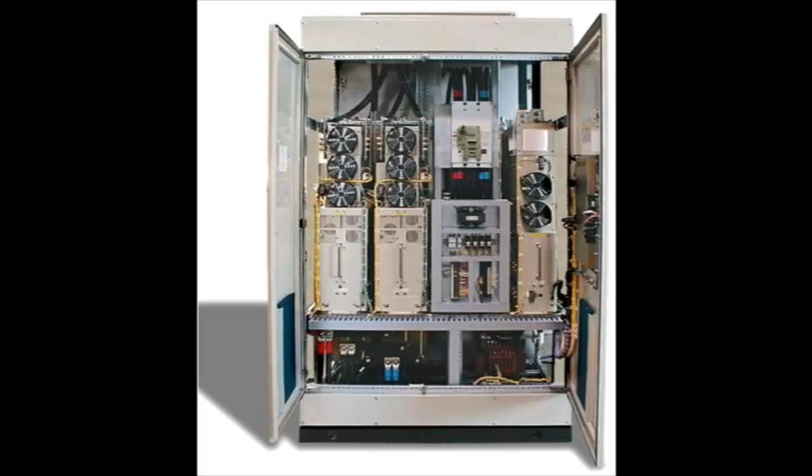Welcome to the Sigma-5 tuning Quickstart video. This is Matt Pelletier, and in this video I will demonstrate how to use the auto-tuning feature using SigmaWin Plus. The system I'll be tuning you may have seen before in the Sigma 2 tuning class.

It's the Rotary drive demo, and it uses the SGM GV09 motor with the Zero Max coupling directly coupled to a 10-to-1 load. The amplifier is a 400 volt SGDV 3R5, and the tuning challenge that we have is the same one as from the Sigma 2 tuning class.

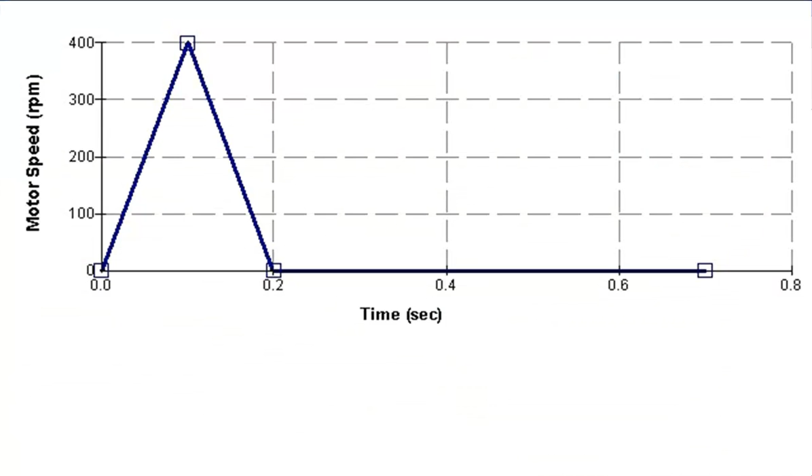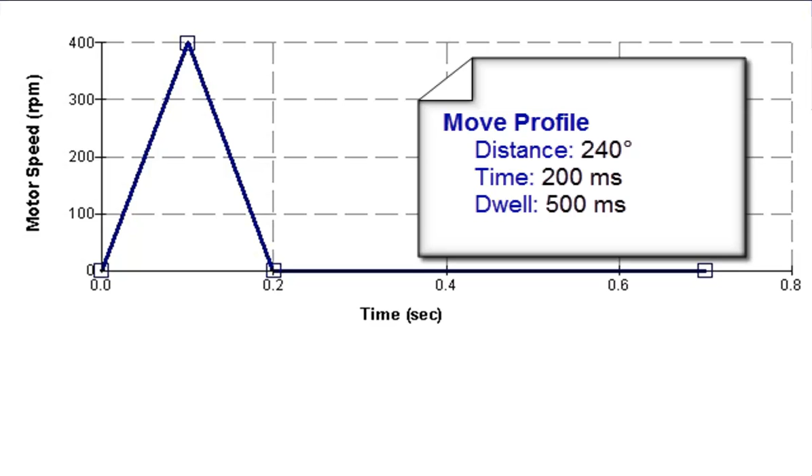We have to move 240 degrees in 200 milliseconds with a 500 millisecond dwell, and the tuning goal is that we would like this machine to operate smoothly and quietly and to settle within 0.07 degrees of the commanded position with a settling time of less than 100 milliseconds.

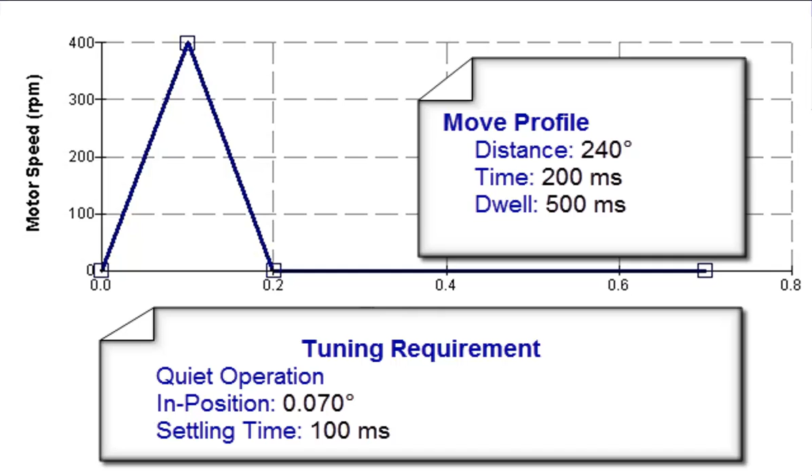So at this point I am connected, the servo pack is on and is at default parameter configuration. So my first goal is just to get the out-of-the-box performance. Let's get a benchmark of the performance. And out of the box we are using the default tuning feature, which is called the tuneless function.

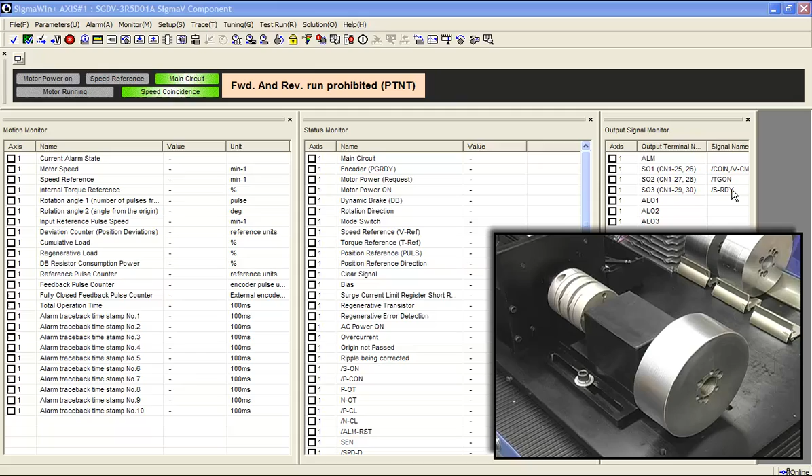But in order to do that, first I need to set up the amplifier and configure the parameters. And the easiest way to do that is to use the parameter wizard. So I'll go up here to parameters and setup wizard. And you'll notice that everything's grayed out except the encoder selection.

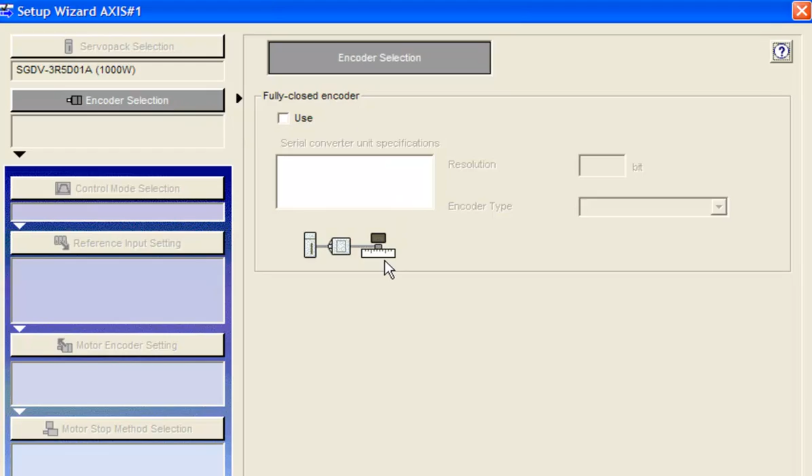So I'll use encoder selection first, and I'll confirm that the fully closed encoder, the linear scale, is not used. So I'll leave that unchecked and hit apply. And now that opens up these other buttons that are not grayed out anymore.

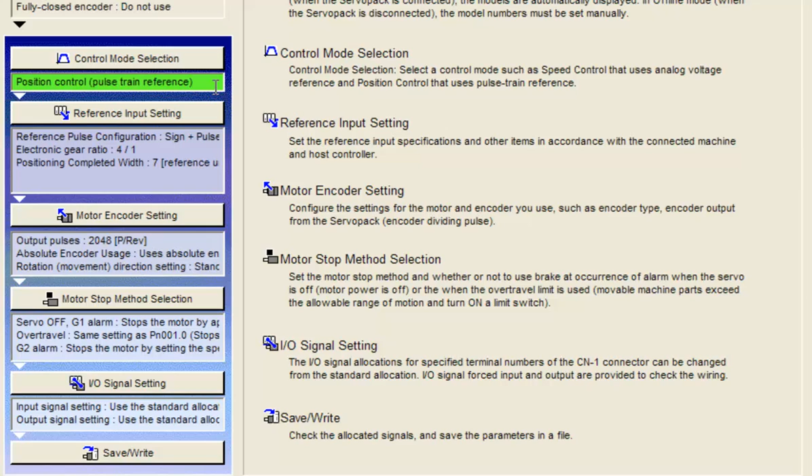First I'll need to set the control mode to position control. So I'll click control mode and scroll here to position control, pulse train reference, hit apply. Notice when I hit apply it shows that there's a change here with a green highlight. Next then is the reference input setting, and I'll leave the first couple screens here at default.

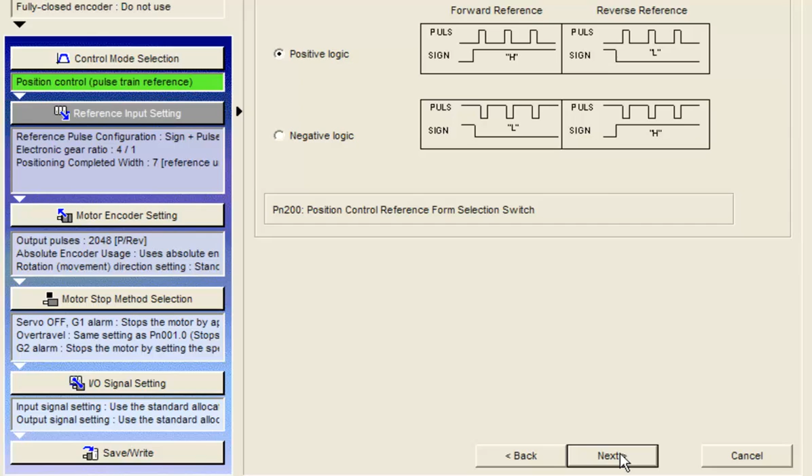These screens have to do with if you are connecting an external controller with a pulse reference output, then what type of format would you want. So I'll leave those at sign and pulse and positive logic. And here's where this wizard really makes things easy. We can set the electronic gear details, which means we can define how far the motor moves with one pulse.

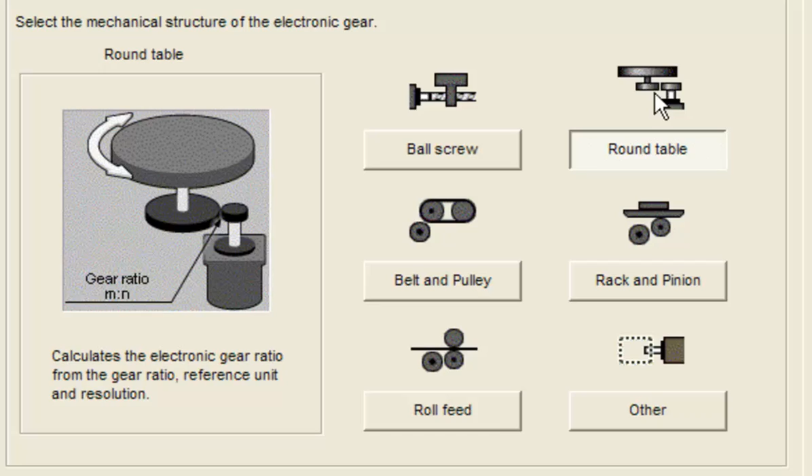So I'll click next, and first I can define the mechanical system by choosing one of the options here. And as you may guess, we have a rotary table, or round table as they call it here. So we'll choose round table. We don't have any gearing, but you can always put a 1-to-1 gear ratio there. And that is the first thing they ask for, the gear ratio, so I'll leave that as 1-to-1. Since there is no gearing, it's just a directly coupled motor to the load, and I'll click next again.

And then this is the part where it really makes it easy. All you have to do is choose the reference unit, and you don't even have to calculate the electronic gear ratio. That'll be calculated for you. This looks like a fine reference unit to me. This reference unit means the minimum motion. When you have one pulse from the controller, this is how far the machine will move, which is 0.001 degree, 1/1000th of a degree. And then the other field to enter here is the position completed width.

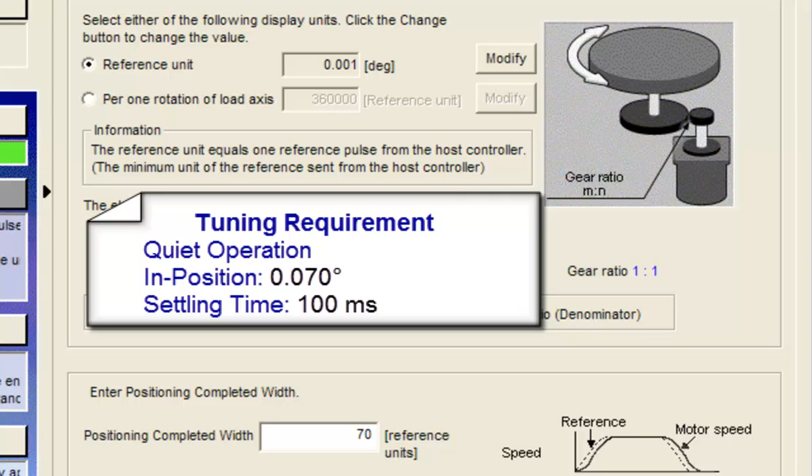This is tied to the COIN signal. You can see that down here. So if we want to have a position completed width, or in-position window is another name for it, we had said we had wanted 0.07 degrees. Well, if our reference unit is 0.001 degrees, I will need 70 reference units to equal 0.07 degrees. 70 of these will equal 0.07 degrees. And I'll hit apply, and that's done.

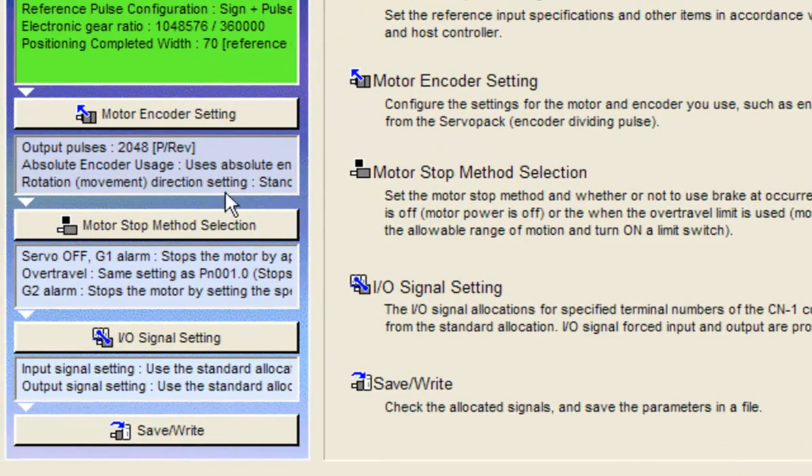Now there are some options under encoder setting and stop method, but we'll just leave those at default. The only other thing I want to do is go to the I/O setting and mask off the overtravels. It's also very easy to do that within the wizard. You go to input signal setting. You see I do have overtravels here. And so for P-OT and N-OT, the overtravels, I will set those to off. It's as easy as clicking always off and OK.

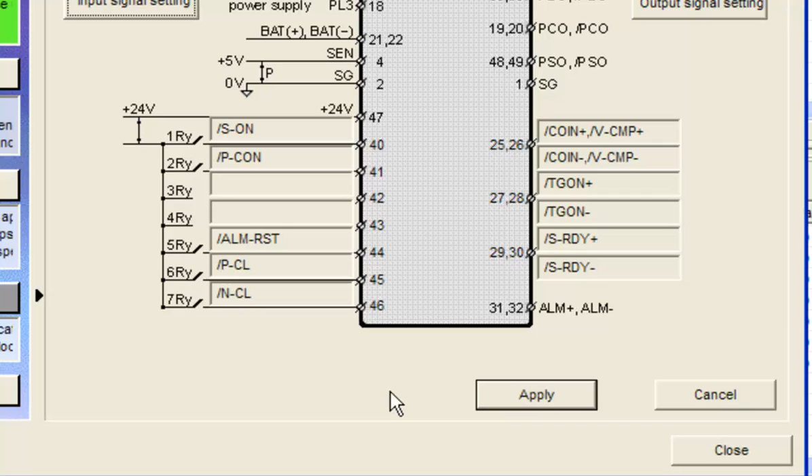And hit apply. And now you can see that these three areas have been changed. So the final step here is to write this to the controller. So we click Save Write, and you can even save a backup file of the parameters that are already in the drive. But I'm just going to write these parameters directly into the amplifier. So I'll hit Write.

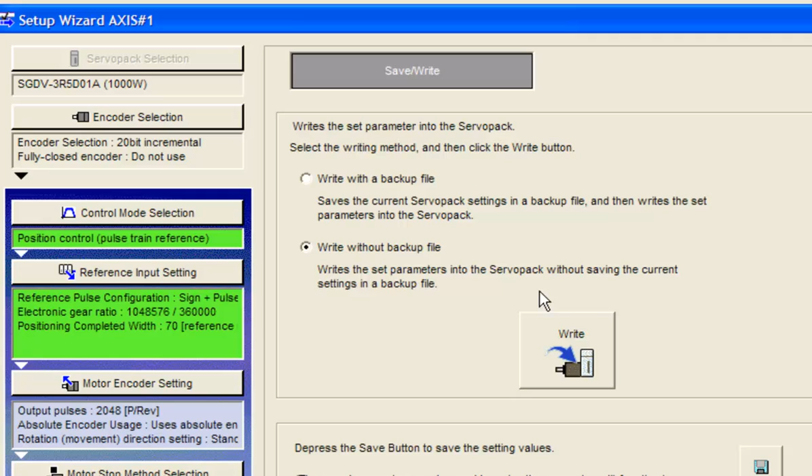This is acceptable. And I do need to cycle power, so I'll click OK. And I'm just going to finish this wizard. And you also notice that there is an alarm A941. Change of parameters requires cycle power.

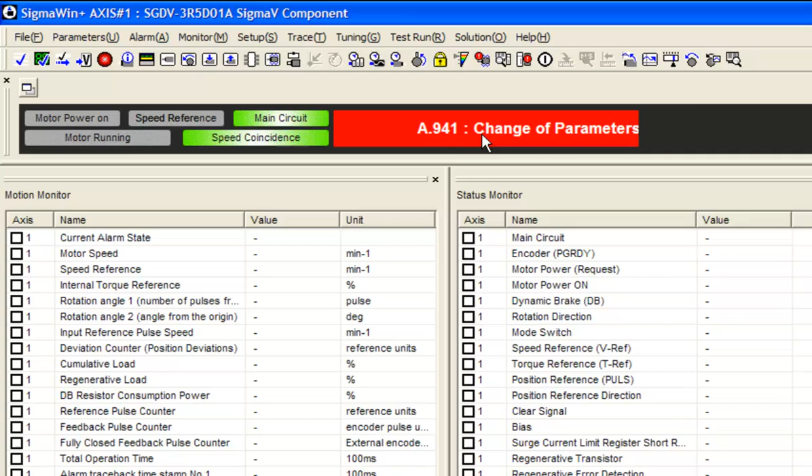There's a very easy way now in Sigma-5 to cycle power. You just use this right here, the software reset button. You don't have to actually physically cycle power. So just click that and execute. It takes about 5 seconds.

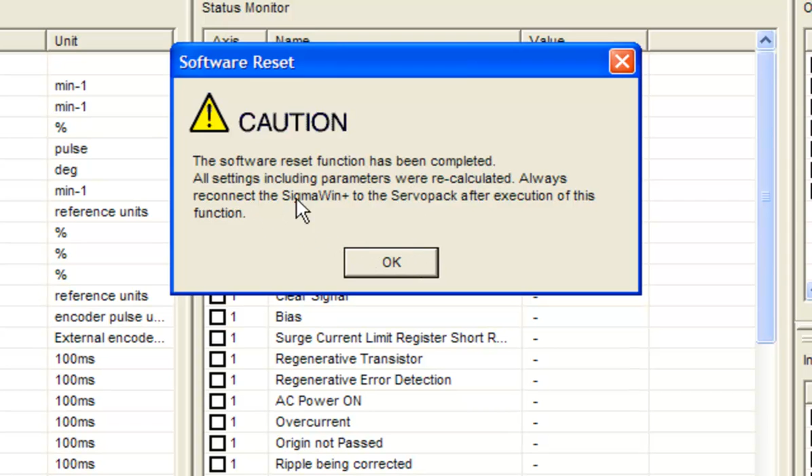Now, when you finish the software reset, it does say that you should always reconnect to SigmaWin Plus. Now, really the only reason for this is if you've remapped inputs, you can see it still shows that there's P-OT and N-OT mapped to the inputs. So everything will be updated when you reconnect.

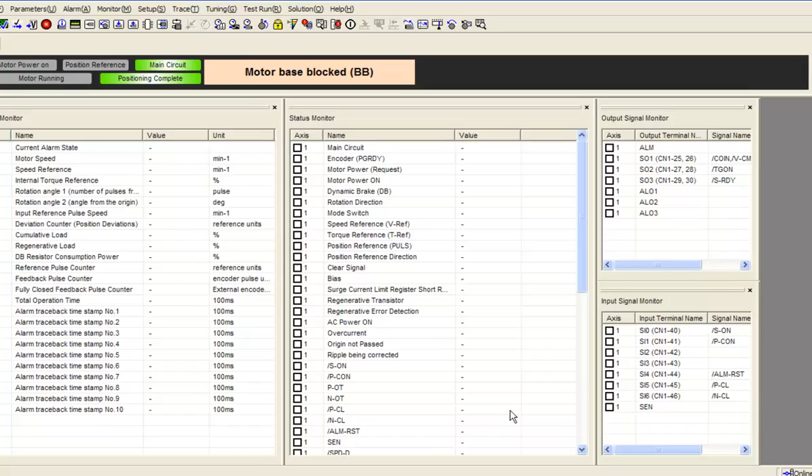So as best practice, I'm just going to go ahead and do that, do file reconnect, and connect to that same Servopack again. And now that I've reconnected, you can see that P-OT and N-OT are not mapped to these pins as they were before.

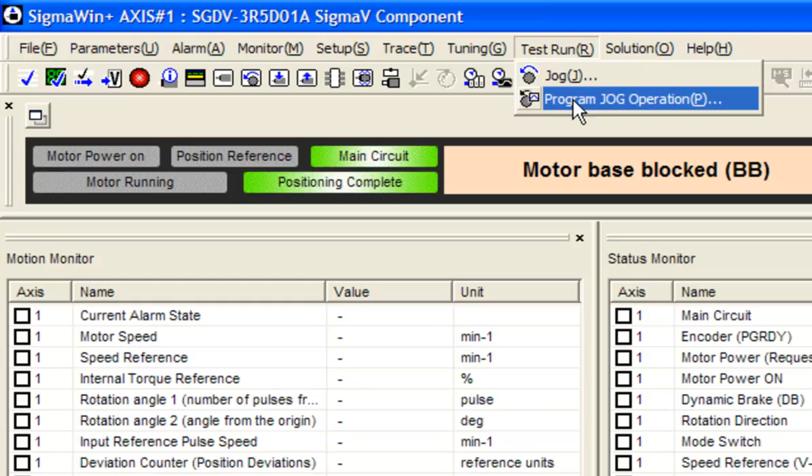So now my first goal is to find the out-of-the-box tuning performance. And so I'll use the program jog operation under the test run menu. And here are some safety warnings you should carefully read. And what program jog allows you to do is to program a simple move profile.

And so I'm going to put in the profile that we're tuning for, which is 240 degrees. And so that's the move distance. So 240. And that is in reference units. So I need to add 3 more zeros since the reference unit is 0.001. The speed was 400 RPM. Now, when you see min -1 as the unit in this software, that means RPM.

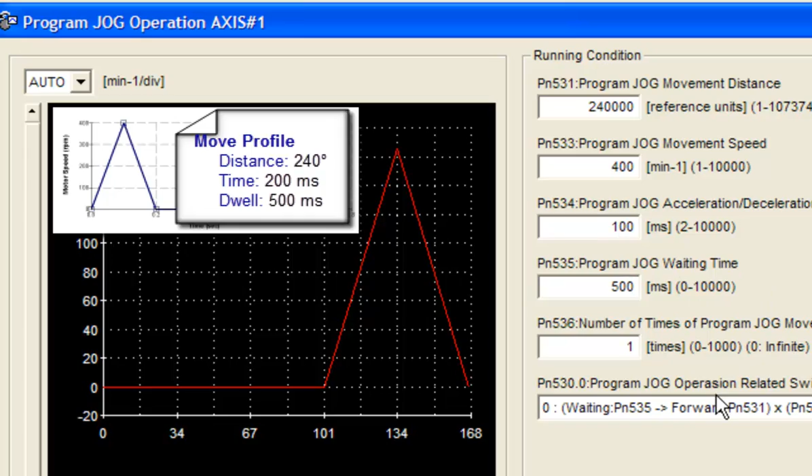The acceleration deceleration time is 100 milliseconds. And we wanted a 500 millisecond waiting time between moves. And if you hit apply, you can then verify as the graph updates to show the move that you've programmed in here.

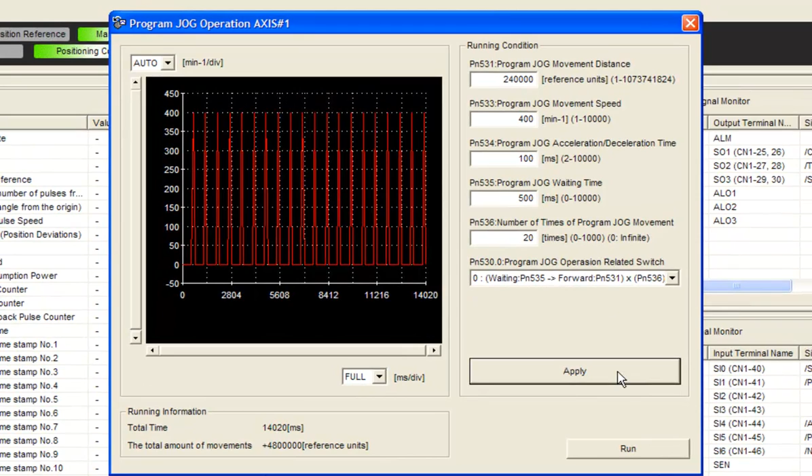So you hit apply, and you can also have this move repeat a few times. And maybe I'll have that repeat 20 times. So this is what the motor is going to do when I hit run. Now, before I run it though, I can simultaneously set up the trace function to graph this move. So under the trace menu, I go to trace.

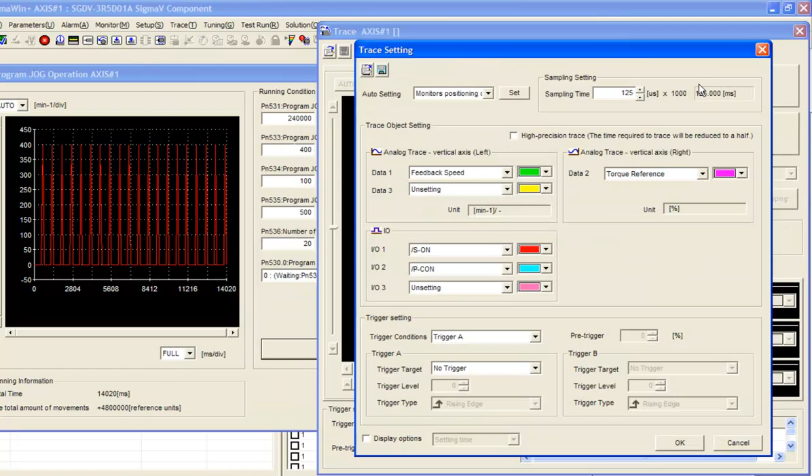And to set up the trace the first time, you need to go to the setup button. And SigmaWin Plus has also really improved the setup screen for the trace function, because you can go to the auto setting and choose one of the settings here according to what you want to graph. So what I'm going to choose is this first one, monitors positioning completion, because I want to see the settling time or the position completion time and in the forward direction.

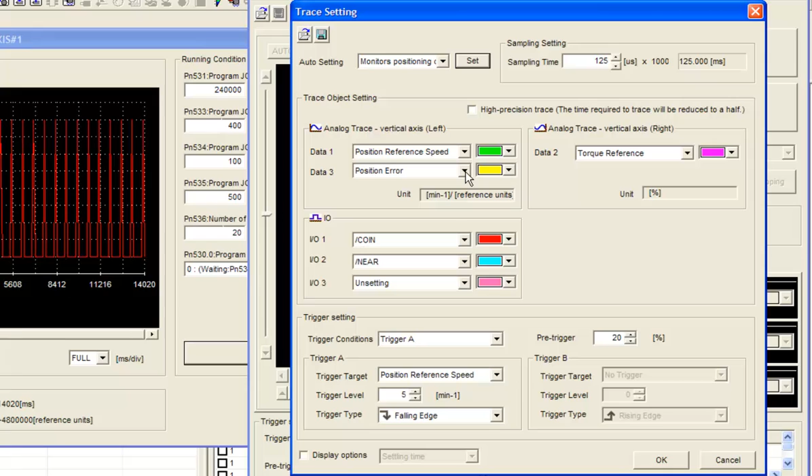Now here's the key, you have to hit the set button, and you can see that that fills in all the other data and triggers and I/O that you can graph automatically. Now I only want one change from this, which is that instead of graphing the position error, I would like to graph the feedback speed.

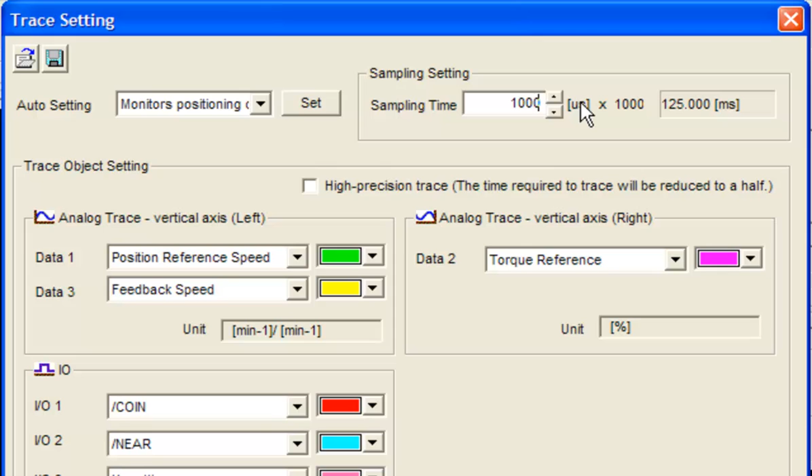And I'd also like to see a little bit more of the move. I don't think 125 milliseconds here will be enough. So I will instead have 1 full second of move here by entering 1000. I'll click OK, and then this will be saved for the rest of my SigmaWin Plus session.

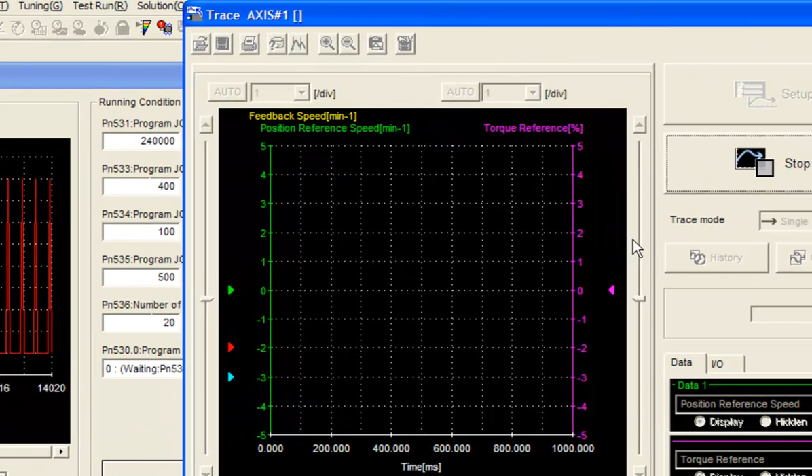I hit start, and it says waiting for trigger. It's just waiting for the motor to move. So back to program jog. I'll start the process and hit run. Servo on. You can hear the servo went on. And execute. There's some oscillation at this point. Now I'll just let that finish.

And then servo off. So this is the result of the tuning less function. And while tuning less does help a little bit, you can see that it's not perfect. It is still noisy. It didn't apply any notch filters or anything. But let me see if I can get some reading on what the position settling time is.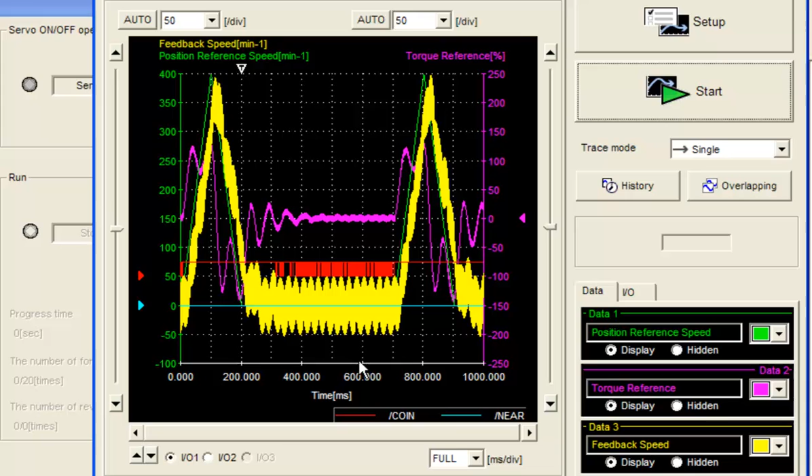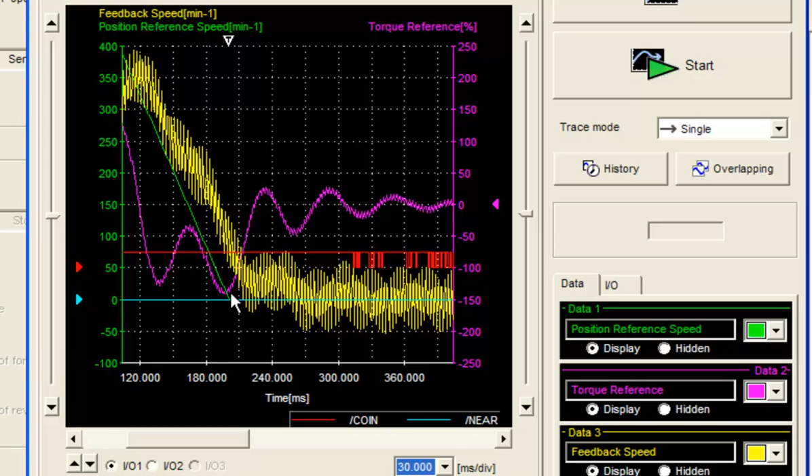So to do that, I'll go down here and change the time scaling. And you can see here, this is where the position reference stopped. And then coin means it went into position, but you can see the coin signal is up and down because the motor is vibrating. So I'll measure it by using the cursors with the cursors button up here.

And so it looks like we were in position right about here where the coin signal started to go low, but the commanded move was to stop right here where the position reference speed went to 0. This used to be called reference pulse speed in Sigma 2. It's the same signal. So this is the settling time between these two cursors, and it comes up with 113.21 milliseconds.

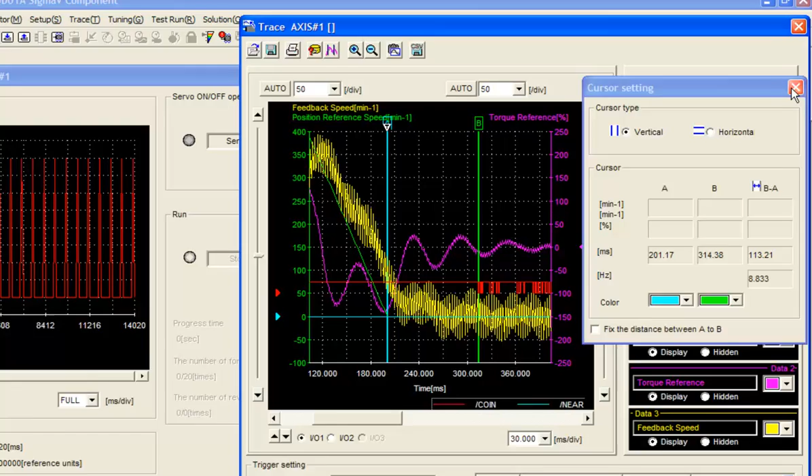That, with tuning less here, it's very close to the 100 milliseconds that was required, and if it wouldn't be for the vibration, it might have even been a suitable performance. So even without doing anything, we already have pretty decent performance except for the noise. But I think we can get it better by using the auto-tuning function.

To use auto-tuning, we will go to the tuning screen. So under the tuning menu, select tuning, and another set of warnings you should read. And click execute. Now you cannot use the tuning less function and auto-tuning at the same time. So this window is just a prompt for you to turn that tuning less function off.

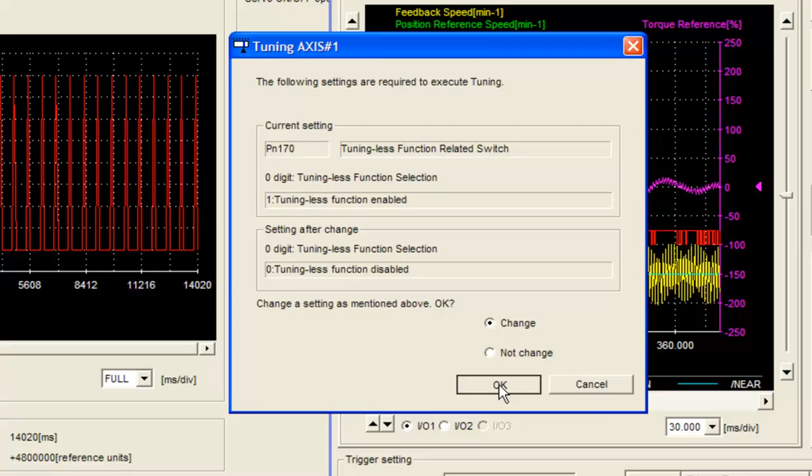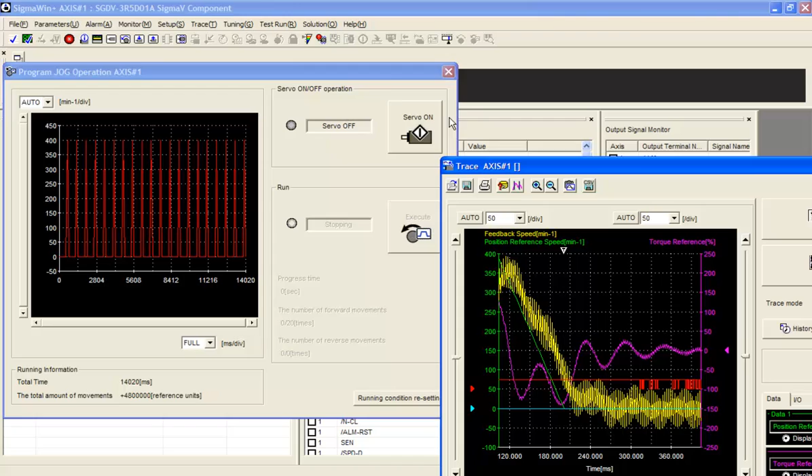So I will click yes, change that, OK. And then there's a warning that you will have to cycle power, so click OK. And now I have the requires restart warning again, so I'll close these windows so that I can get to the software reset button. I'm not going to save the graph. So restart right here with the software reset, take advantage of that feature, and execute.

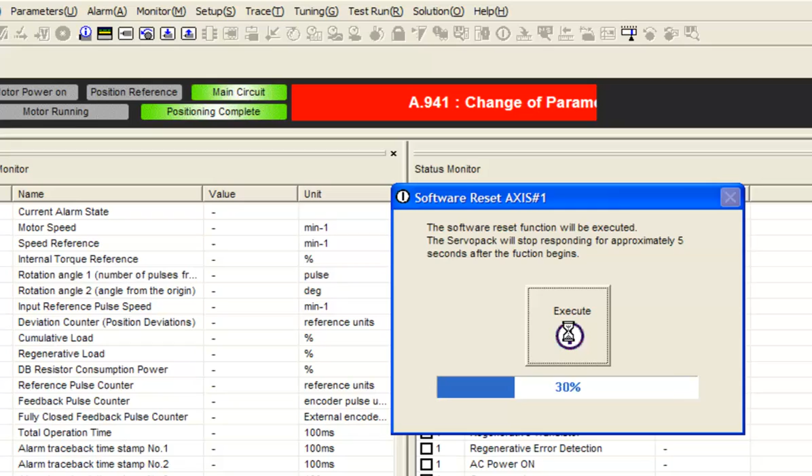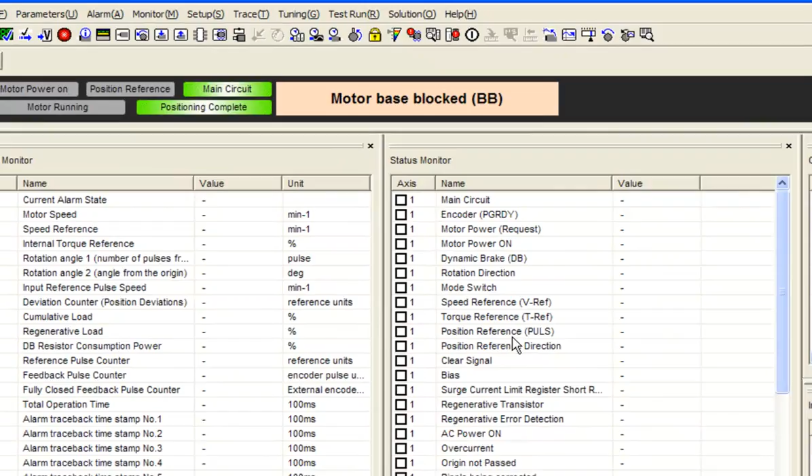So now, according to this caution, I should reconnect, but since I did not change any inputs, I really don't have to do that, so I'm just going to skip over that this time. Right now, we are not using the tuning less function. So let's go up to the tuning menu, and we'll try the tuning function again. We'll execute the tuning function, and now we're able to see this first screen.

Now, starting up here at the top, you could try to independently find the moment of inertia ratio, but we found that it works just fine to find the moment of inertia ratio during the auto-tuning procedure. And within the auto-tuning procedure, you have two choices. You can either tune with a move that's given to the servo pack from an external controller. They're showing a little picture of a controller sending the move to the servo pack here.

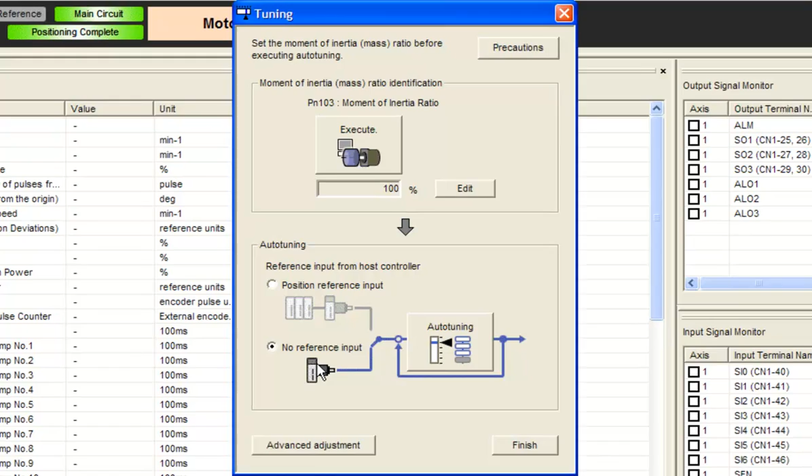Or what our preferred method is to use the no reference input selection and let the servo pack use its own specialized pre-programmed moves and auto-tune to those. So that's what we would recommend that you do. So I click the auto-tuning button, and it does give a warning, and this warning is just telling us that we haven't found the inertia yet, but we know that we're choosing to do it that way, and we will find the inertia within the auto-tuning procedure.

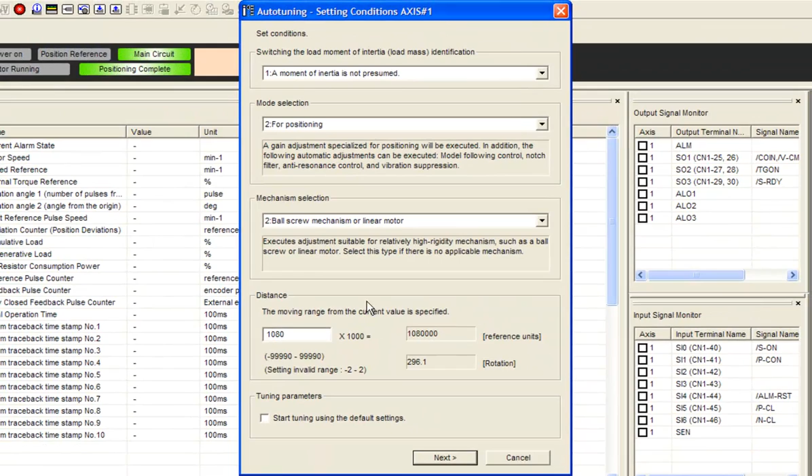So click OK. And we now are presented with this dialog, and the first field here is conditions, and the options are a moment of inertia is presumed and a moment of inertia is not presumed. Okay, what this means is, do you already know the inertia ratio, or do you want the auto-tuning procedure to calculate the inertia for you?

So if you don't know the moment of inertia ratio, you want to choose setting 0. The moment of inertia ratio is presumed. What that means is the moment of inertia ratio is calculated. Instead of presumed, put in the word calculated. It makes a little more sense.

The next option is mode selection, where you have 3 choices: standard, positioning, or to prevent overshooting. And since we're focusing on positioning time, we'll choose positioning. And there's a description area here, so the other modes also have a description. You can try to choose the one that best fits the description of what you're trying to do.

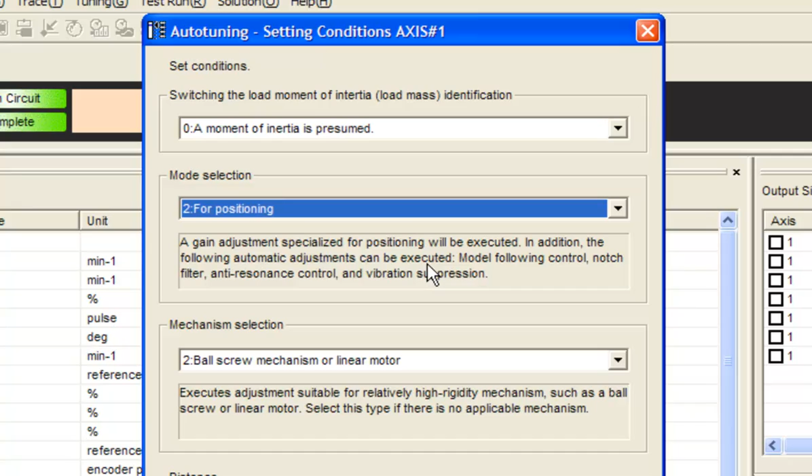Mechanism selection is next. You can use belt, ball screw, or rigid model. I think belt and ball screw are pretty clear. Rigid model is what we have here, where you have a load directly coupled to the motor. So we'll choose rigid model.

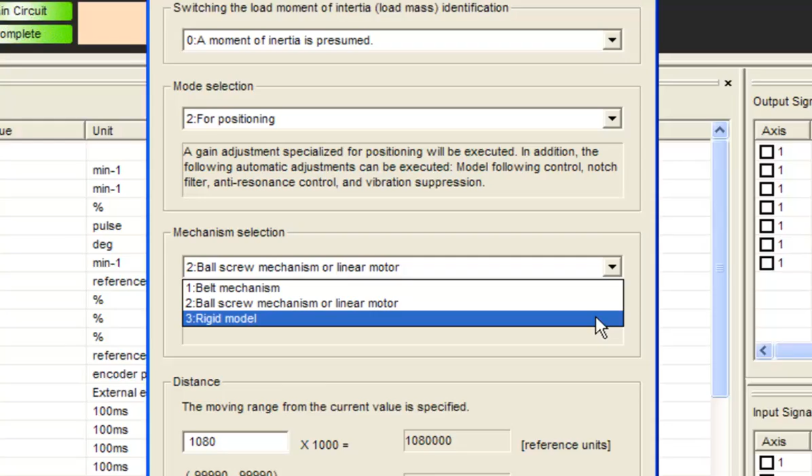And now finally, distance. This is the distance of the auto-tuning move. It will be doing a move that's 3 revolutions back and forth as the maximum move distance. So this number of reference units will equal 3 revolutions of the motor.

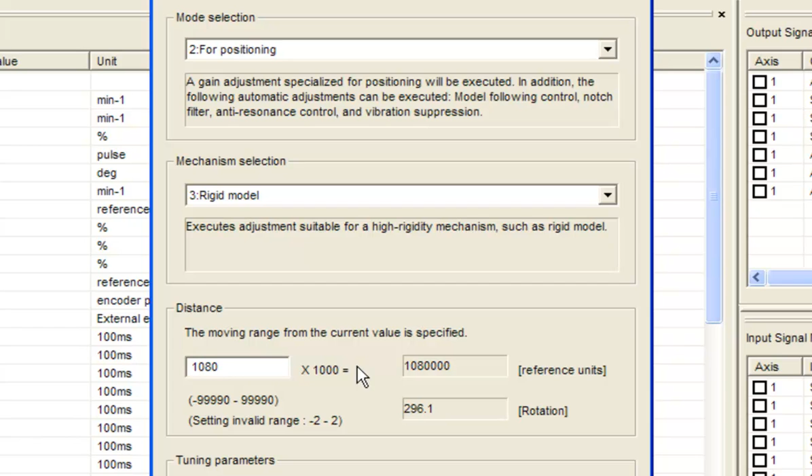Now if you have a mechanism where 3 revolutions would be too far, maybe you're close to a hard stop, there's no way to get away from it, then you might want to change this to a lower value. Otherwise, we suggest you just leave it at the default of 3 revolutions. So since we have a rotary axis, we can go as far as we want. We can just leave that at default and click Next.

So you can see here in this screen the order of operations that it will take: find the moment of inertia, remove oscillation, and find the best gains. So let's just get it started here and click servo on. And you can hear it, it's oscillating. Click start tuning. And you just sit back and let it tune.

So right now you can see it already applied a notch filter right away. It does that as soon as possible. It finds the moment of inertia. Now it's looking for oscillation to see if it needs to apply the anti-resonance or vibration suppression filter. And you can tell by the result here that it did not need to do that. Now it just is going through and by trial and error finding best gains. So it does a series of different moves.

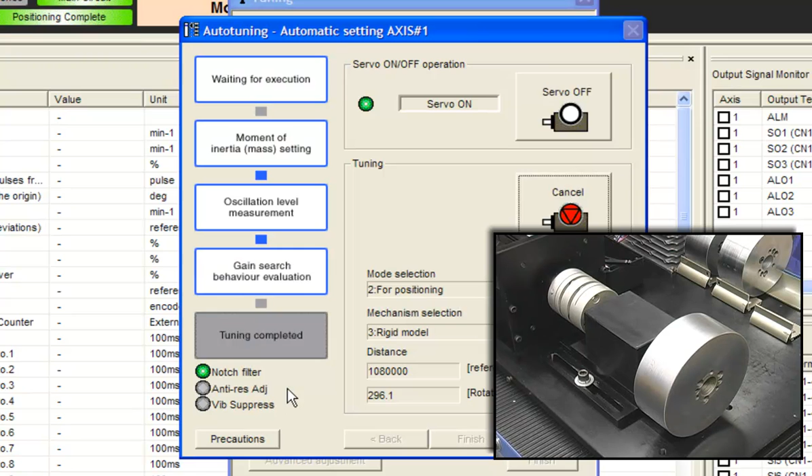And tuning is completed. So we'll click Finish. And we'll click Finish again. That's the end of auto tuning. Now there are other advanced adjustments, but that'll be another video. And you can even see what it found for the inertia here, 911, and that's pretty close. A 10-to-1 inertia was the design of this machine.

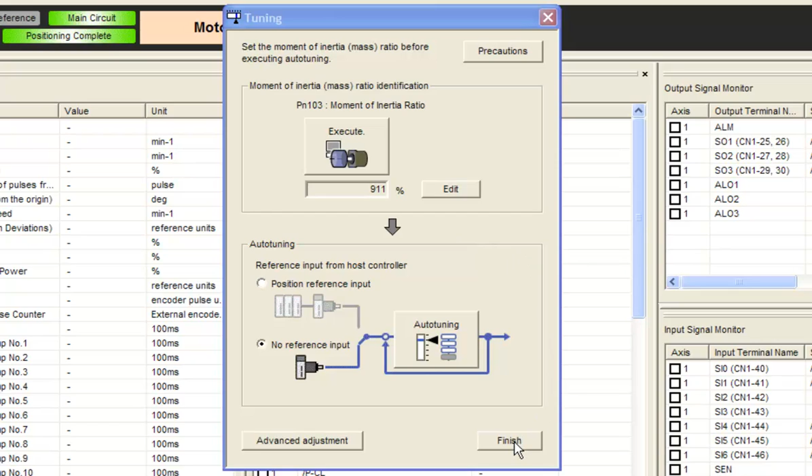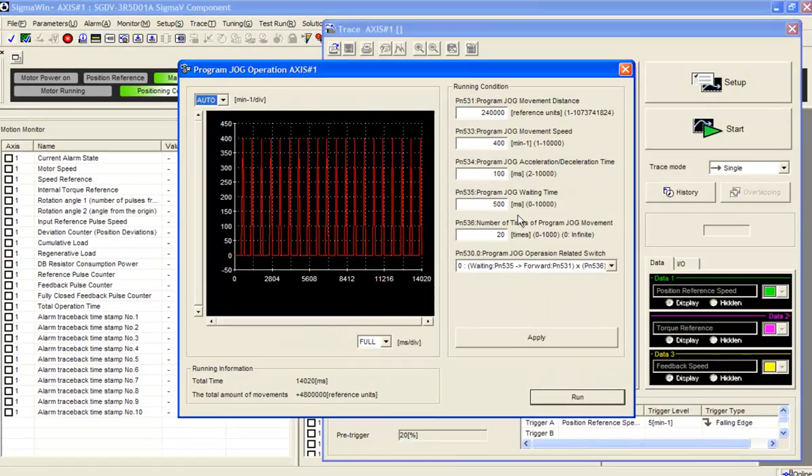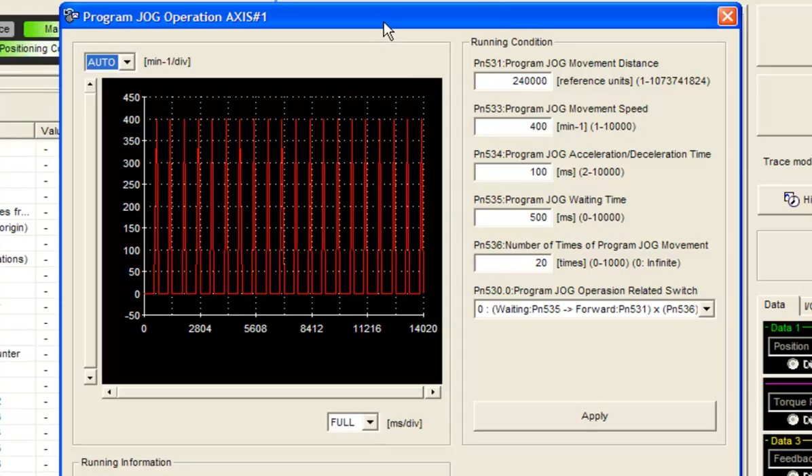But the true test is going to be in the graph. So let's pull up the graph again. So we go to Trace, Trace, and I'll move that one over to the right like I had before. And we also need to pull up Program Jog again. And you see that Program Jog is set up from before because these are parameters, PNs, in the drive. So this Program Jog will be saved here for the rest of the lifetime of this drive unless you change those parameters. So I'll move that over a little bit and I will start the graph.

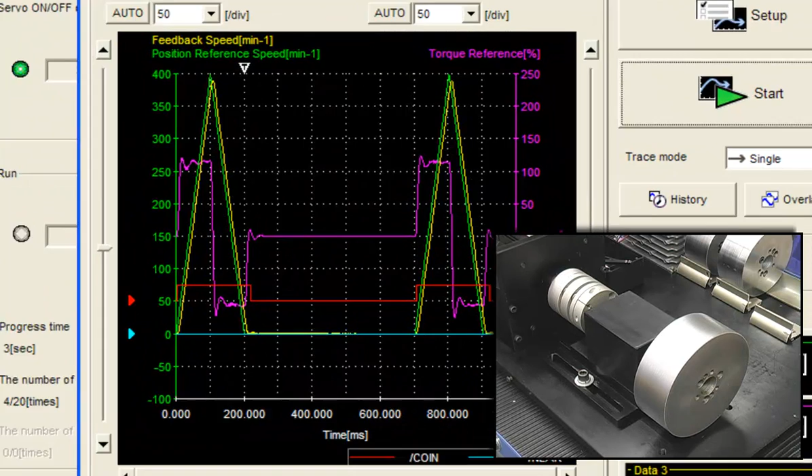It's waiting now for the trigger. We will then run the Program Jog and hit execute. And I think you can tell already, just by looking at the 30,000 foot view here, that it looks very good. Let's just zoom in a little bit. I always like to use the time scale to zoom in.

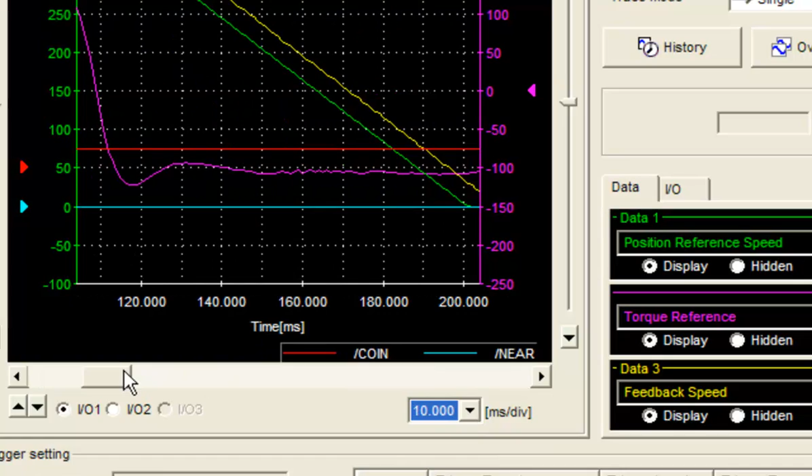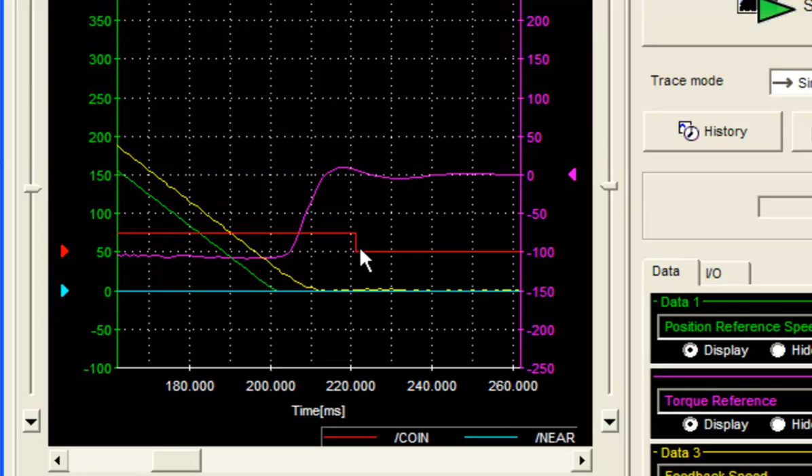And so there's our deceleration with the position reference speed coming down to 0. This is when the motor should have stopped. And here's where the motor actually did stop, where the coin signal goes low. Coin signal here in red. Where the coin signal goes low is when we are within 0.07 degrees of the final position. So I'll put the cursors up here again.

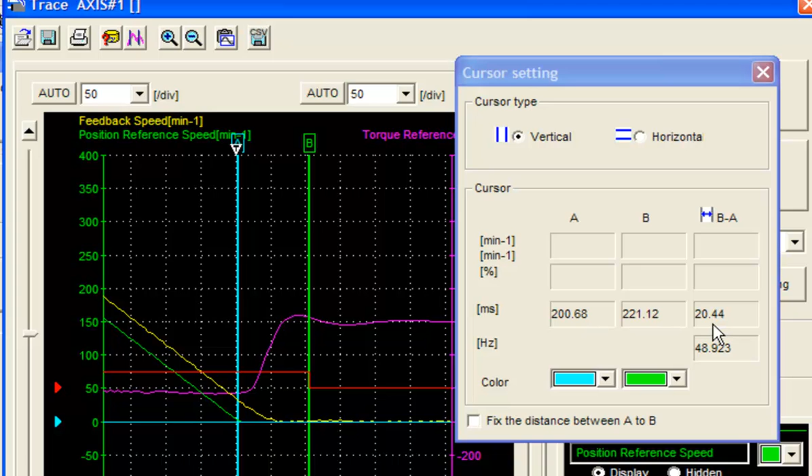And you can see our final result is just around 20 milliseconds. So we have beaten our tuning goal of 100 milliseconds by 5 times. We have a number 5 times lower. And if you look here at the graph again, you can tell that the torque is very smooth. It has some ripple, but even listening to it, you can tell that it's very quiet.

So I think we can agree that the Sigma-5 auto-tuning does what it says it can do. It's very high performance, very easy to use, and does a really great job.